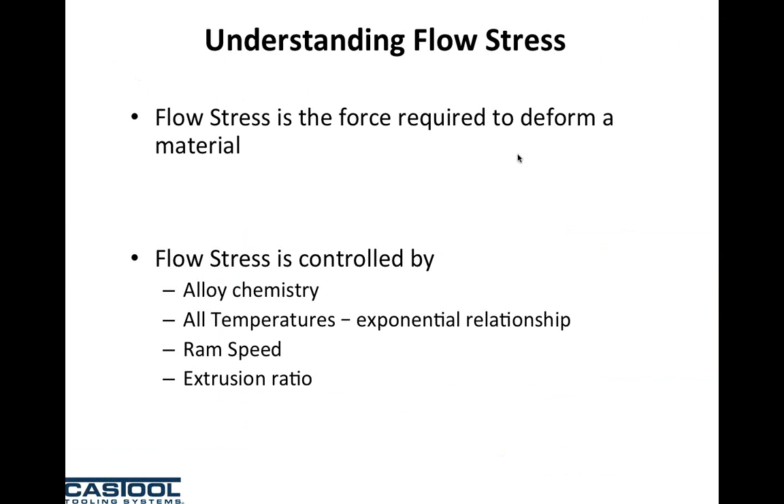So the factors that would affect the flow stress: if you look at different types of alloys, 6061 has higher flow stress compared to 6063, so it's harder to extrude. Also, the temperature affects its flow stress. At a higher temperature, the flow stress is lower, so it's easier to extrude through the die. And when you try to deform the material faster, increasing the ram speed, then you will also increase the flow stress, making it harder to extrude. And obviously, when extrusion ratio is high, it will be harder to extrude as well.

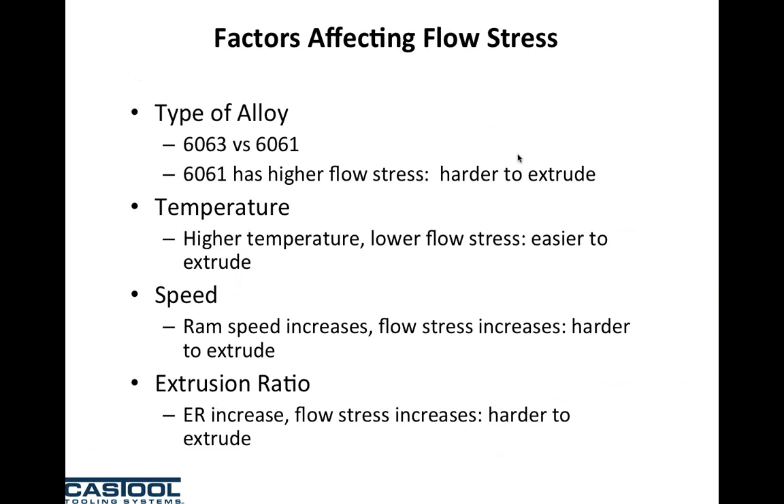When we look at ram speed, what's interesting with 6063 alloy is that if we double the ram speed, we only increase flow stress by 10%. So most people would believe that if you doubled your ram speed, your flow stress would go up similarly. But it's actually quite easy to go faster.

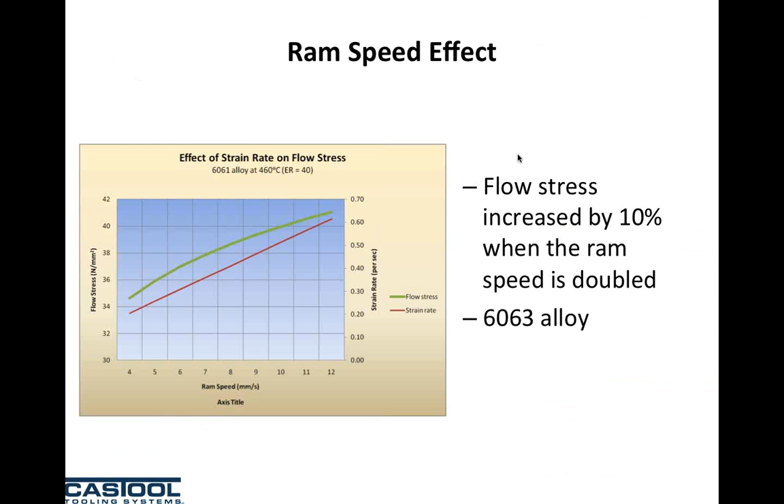The temperature effect is exponential, so all alloys are temperature sensitive. Looking at 7000 series alloy, every time you drop the temperature by 20 degrees Celsius, the flow stress increases by 20%. For 6063, a 20 degree Celsius drop increases flow stress by 10%. Compared to RAM speed, which is relatively insensitive, temperature is very, very sensitive to flow stress.

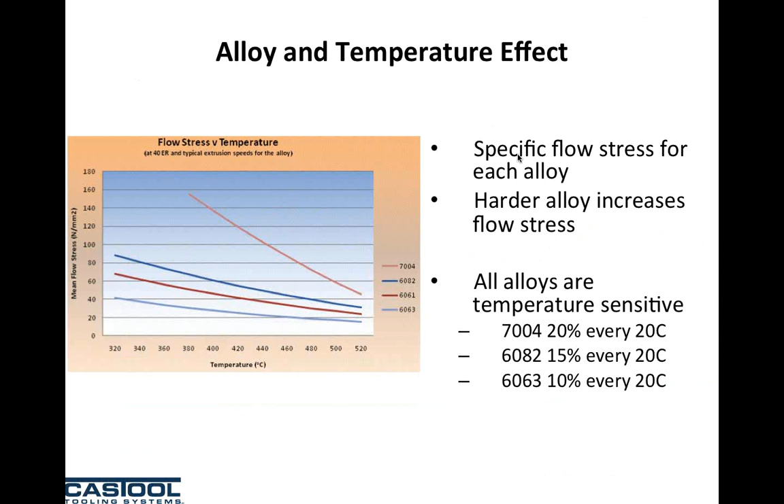If you're only extruding 6063 alloy with comparatively simple shapes and have poor temperature control, you can probably survive. But as you start moving into 6061 and 6082, temperature has more effect on flow stress, and when you have temperature instability or poor control, you have a hard time making profit.

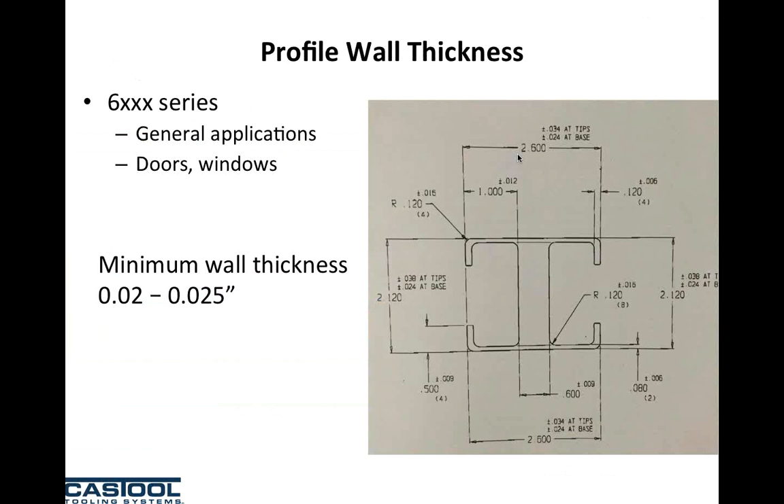When we look at wall thickness, flow stress also gets involved, and I think this is something a lot of people forget. If you're doing a standard window shape, you may have minimum wall thicknesses down as low as 20 to 25 thou, and 6063 is an adequate alloy for this. But if you want to do heat exchanger tubing or precision tubing where wall thicknesses can get down to 8 to 10 thou, often less than 15 thou, the reality is the flow stress of 6063 does not enable you to extrude that thin of a wall. Basically, the die would plug and nothing would come out the other end. So we go to alloys with lower flow stress that can also extrude thinner walls.

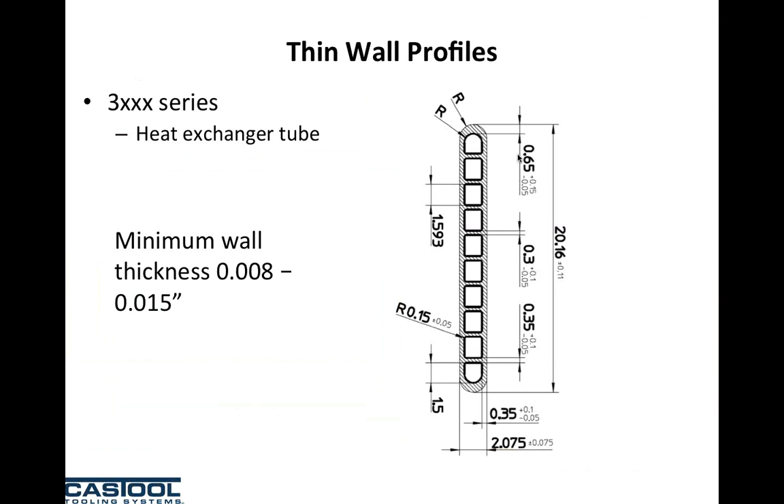What's interesting is the minimum aperture or wall thickness you can extrude through the die is also very similar to the gap between the dummy block and the liner. So the aperture or gap between your dummy block and liner at temperature during operation is virtually identical to the die aperture.

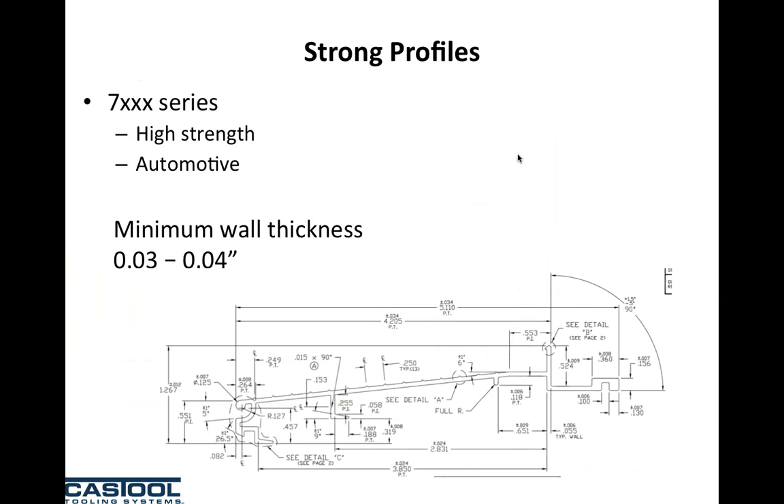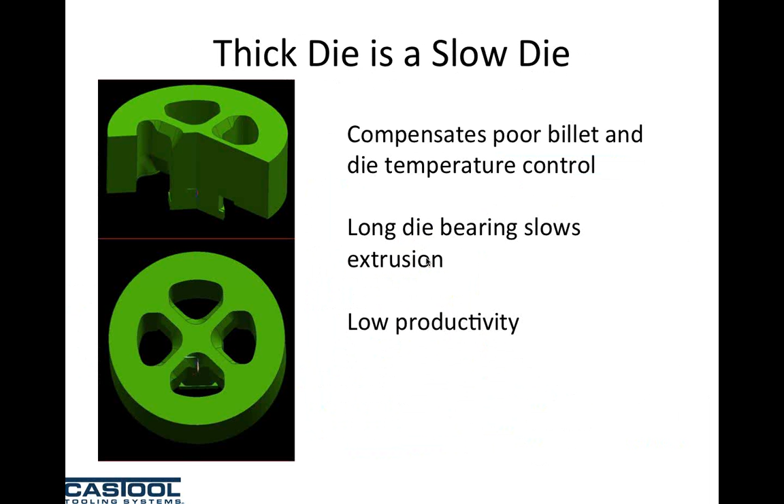This is a look at what is a rather thick die with rather small ports. Typically these are used to compensate for poor billet and die temperature control. Last week I was with 7 different extruders through Southeast Asia, and all the die correctors want thick dies with long bearings, because they do so much die correction due to temperature instability that they need something to work with. If given a thin die with open ports and short bearings, there wouldn't be enough material for them to control the die. The problem is a thick die with long bearings is a slow die - it requires a hot billet temperature and ends up with a rather slow ram speed.

The alternative is a high-performance die. These require temperature management of the billet, die, and container, and very often the same people using these dies are using lean alloys. What they're achieving is ram speeds typically 40 to 50% faster than the average in the marketplace. So a lot of extruders say, great, I want one of those high-performance dies. But unless your billet temperature is plus or minus 10F, your die temperature is plus or minus 10F, and your container is stable at plus or minus 10 degrees Fahrenheit, unfortunately it won't work. Your die corrector will come back and say, we tried that die, got lousy profiles, give me a thick die with long bearings so I can fix your problem.

When we look at the cost basis, the super extruders running these fast ram speeds have costs significantly less than the standard extruder - by significant, we're looking at a 40% difference. So by running 40% faster ram speeds, they're reducing cost, if you look at $1,000 per hour press cost, by about 40%, from 33 cents per pound to 20 cents per pound. Is it worth it? I don't know, that's up for you guys to tell us I guess. But the return on investment from managing temperature of the billet, container, die, exit temperature, quench temperature, and aging temperature seems pretty straightforward to me.

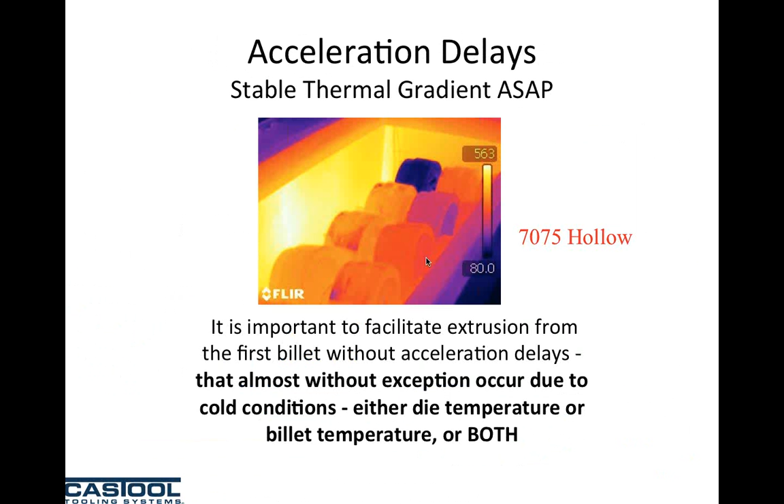I said it a number of times last week, and I guess a lot of people got upset with me - chest ovens don't work. If the goal is to have a die that's plus or minus 10 degrees Fahrenheit uniformly from billet temperature, and you're heating dies with chest ovens, it's impossible to do that. Chest ovens produce cold dies, inconsistent dies, and typically dies stay in them too long and end up with oxidized bearings.

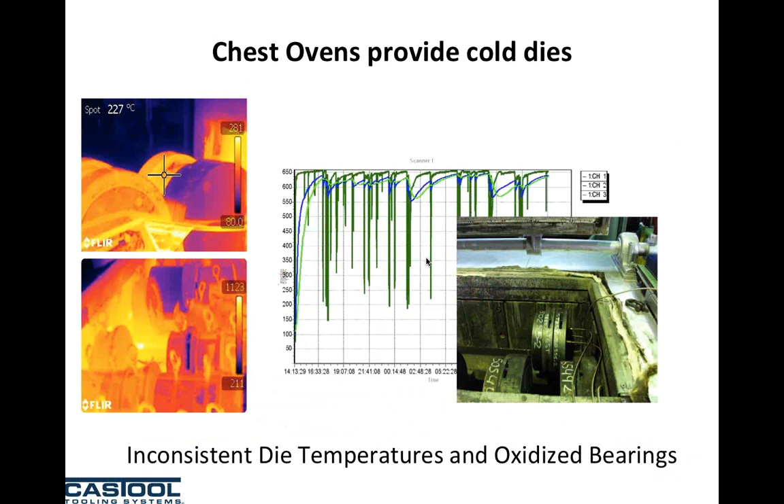Unfortunately, the die bearing, being an EDM surface, attracts oxides faster than any other item in the die oven. Another big problem, just to touch on it, is the adhesive layer on the die bearing.

A lot of people put fans in their die ovens, and basically the fan's job is to pull air from the factory and push it into the die oven to heat the dies quicker through convection. The worst thing you can possibly do is take the dirt from the factory and push it into your die oven, because it's going to end up in your die bearings.

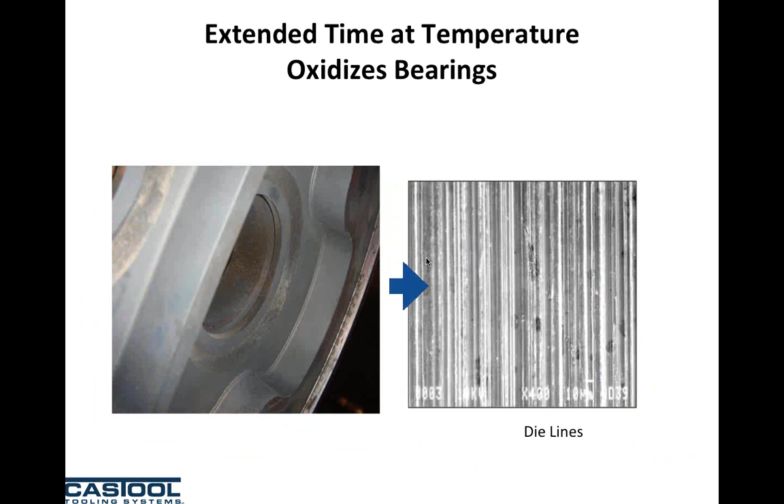Single cell die ovens basically heat one die at a time. I would say 100% of the super extruders in the world today heat one die in one oven, and it's the only way of having 100% control over your die temperature. We hear all the excuses from poor to average extruders around the world about why it's impossible to heat dies one at a time. But the reality is it works.

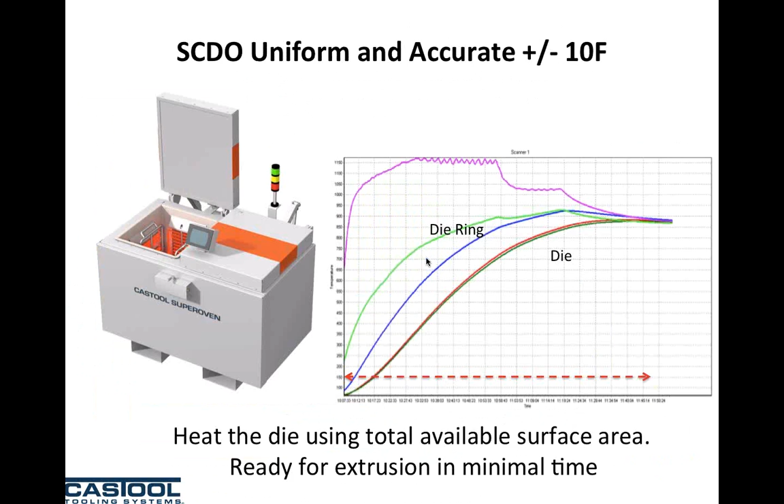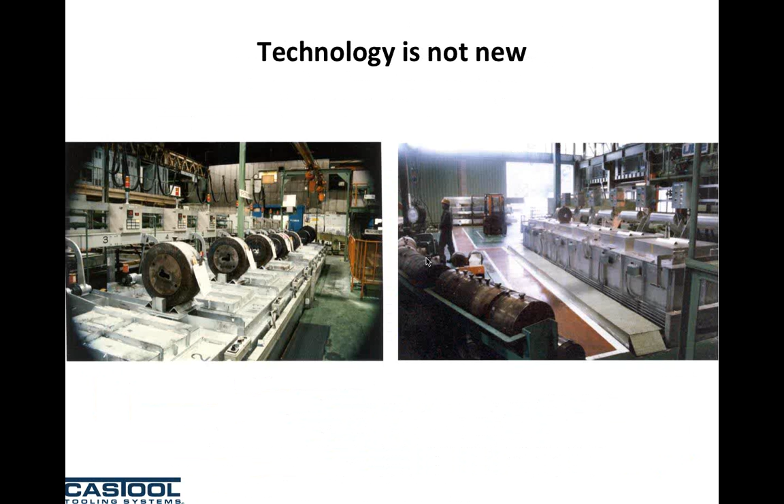Even when you have a perfect die coming out of the die oven, the die can cool down quickly in the air, around 10 degrees Fahrenheit per minute, or 20 degrees Fahrenheit per minute in the die slide. So you're not really getting the temperature you think you're getting when you leave the die in the air too long, or in the die slide too long. Then when you start to extrude, you'll start to see the flow stress get affected because of the die temperatures.

You also want to be recording these times - when the die goes into your die oven, when it comes out, and when it's used. If you have a 3 to 5 minute delay because you have a butt stuck on your butt knocker, or you're cleaning aluminum from the liner seal face, in 3 minutes your die is going to lose 60 degrees. In 5 minutes it's going to lose 100 degrees.

As a rule of thumb for 6063 alloys, we say 10 degrees Fahrenheit relates to about a 1% rate of flow. So for every 10 degrees colder your die is than billet temperature, it requires 1% more force, or the flow through the die is reduced by 1%. So if the die was 100 degrees colder than your billet - say billet 860, die 760 - it would take 10% more effort to extrude the die.

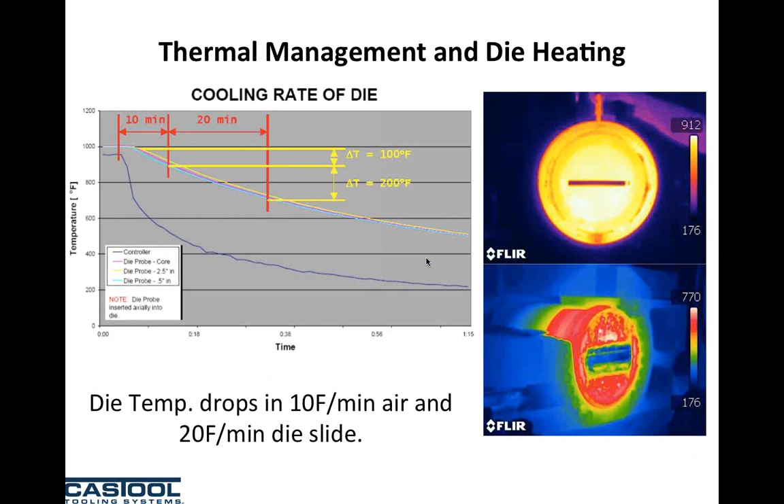We get into a lot of die correction as well, and we find that probably about 90% of all die correction is correcting the die for temperature, not because the die was made improperly. So even if we take the die perfectly from the die oven and sit it in the die slide, and leave it there for 3 to 5 minutes, the bottom of the die is going to lose more heat than the top of the die through conduction between the die and the die slide.

So your nose piece, or if you're running a 2-hole, the top holes are going to go faster than the bottom holes. Say we left the die in for 5 minutes and reduced the temperature at the bottom by 100 degrees - back to my rule of thumb, we'd expect about 10% more flow through the top of the die than the bottom.

The die corrector would choke the top bearings, and the next time the die goes to the press, if you left it in the die slide for 5 minutes again, it would be fine. But if you don't get the butt stuck on the butt knocker this time, and you actually extrude quickly, the top holes now will hold back, and the bottom holes will go through - and your die corrector will be chasing this.

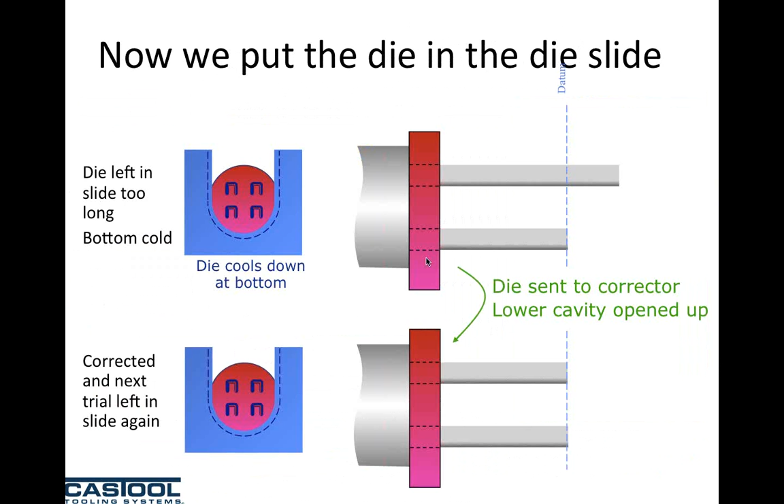Temperature affects flow rates, whether it's the container affecting the die slide affecting the die, even chest ovens tend to heat the die from the bottom up. So when you bring a die out of the chest oven, typically the bottom of the die will be hotter than the top. If you leave the die in the die slide for 5 minutes, the bottom will be colder than the top.

We'll talk about the container effect next, but typically the top of the container is hotter than the bottom, anywhere from 50 to 100 degrees. So after you extrude anywhere from 5 to 7 billets, the top of the die will become hotter than the bottom, and the flow or runout through the top of the die will now be faster. It's very difficult to correct a die for temperature, if not impossible.

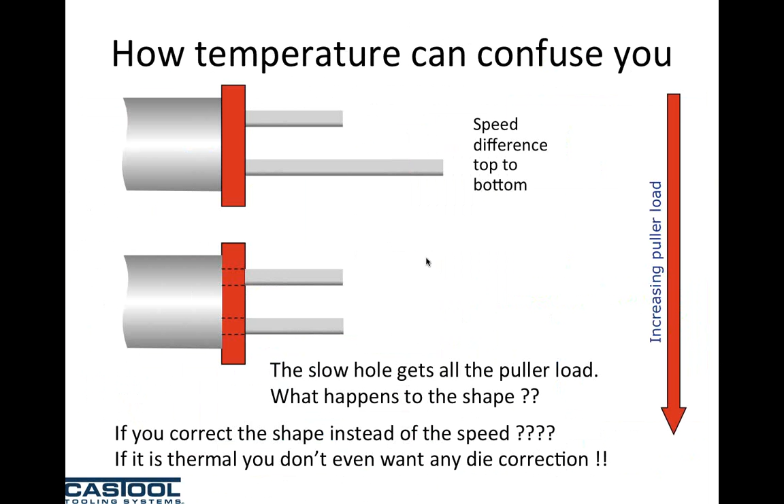The biggest problem with the container is that it's big. Containers are anywhere from 5 tons to, I think the biggest container we do is 37 tons. The die in comparison is hundreds of pounds. There's a complete imbalance, and because the mass of the container is greater, the thermal mass is also greater, so the container controls the die.

Also, when people try to heat up the container, there are several options, and we see a lot of people still using external heaters. In order for the liner to be at extrusion temperature, you need a high temperature from the shell or container shell, which can be around 700 degrees Celsius. We know even hot work tool steel, H13, would not withstand that temperature for a long time, and you're going to anneal the container.

When you anneal the container, the mechanical strength or integrity of the container is gone. When you extrude, the liner is going to be bellied. And because of the profile, it's hotter outside and colder inside, so you're going to see temperature swing and temperature changes. The liner can be too hot during extrusion as well.

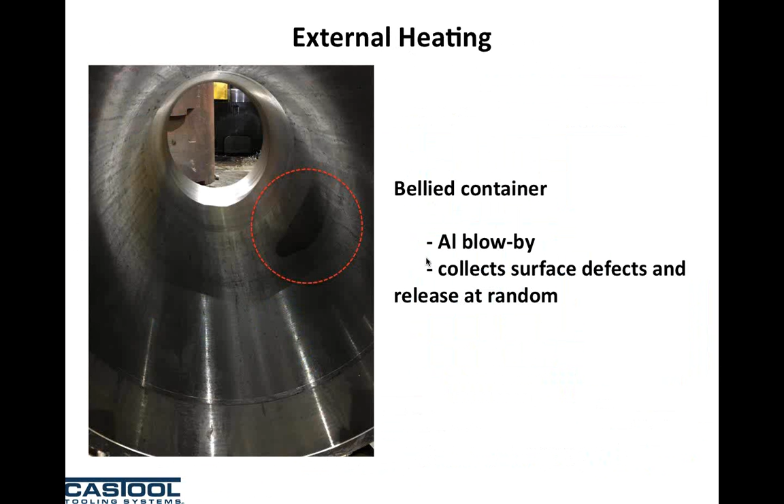So all we want, or what we are asking, the goal of the container is thermal stability. That thermal stability can give you quality extrusions and high productivity, and also mechanical alignment, because when you expand the container, due to its diameter, the alignment can be off, and we want to have a round cylindrical bore between the liner and the dummy block. So to rephrase, thermal stability of the container is the key.

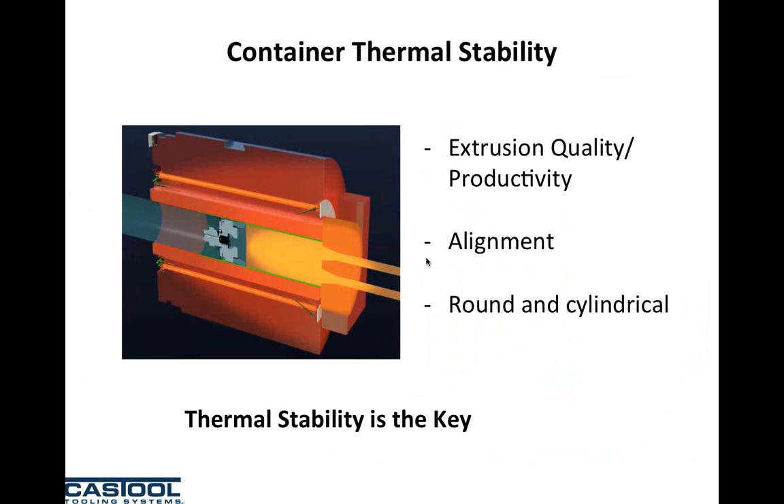If we take a look back at our external heating - actually we'll go with this one. A lot of extruders that I visited last week operate 6 days a week. On Sundays, basically, they set their liner at 800 and some odd degrees Fahrenheit, and the heating elements are running between 1300 and 1400 degrees. So by Monday morning, the container housing is easily 800 degrees, if not 900 degrees.

When the container housing is hot, it actually lifts the container and ruins the alignment between your container and your die, and your container and stem. So it's not just about temperature - temperature also affects mechanical alignment.

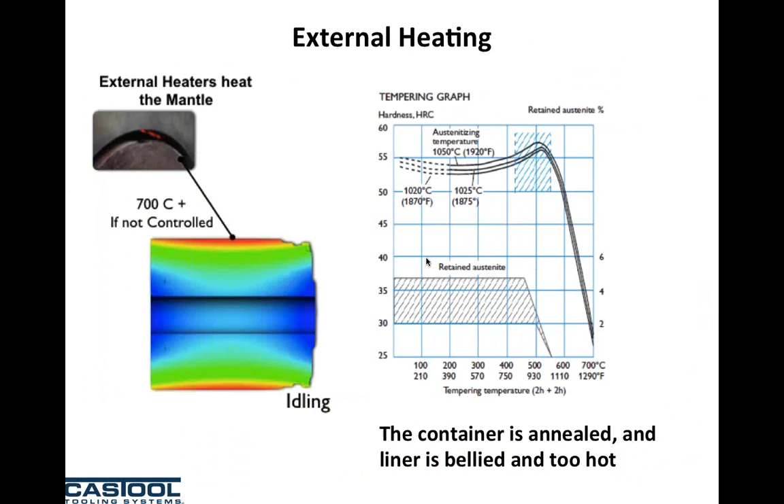Also, the temperature of the liner would affect the billet skin flow. What you want is a consistent temperature differential between the billet and your liner surface, around 50 to 60 Fahrenheit, so you can hold back the surface defects and keep them there as a skin, and use a cold cleanup block to clean after.

If you don't know the temperature of the liner surface, you don't know if the skin defect is going to stay at the shell there or go into your profile extrusions. So it could be anything if you don't control the liner temperature, or if you don't have thermal stability of your liner. Again, the goal is to keep 100% of the inverse segregation and oxides in the butt. What we don't want is any of that basically leaking into the profile.

We can help it by keeping the port openings away from the liner, and by doing all sorts of good housekeeping things. But if your liner is unstable or approaching billet temperatures, the oxides that we want to hold back into the butt on the liner wall are going to be leaking into your profile.

Last week, again, I was at 7 different extruders, and every one of them brought out lots of samples to show us of bad surface finish. And when surface finish is random, it's typically the fault of the container, not of your alloy. Just about every extruder I visited had installed billet brushes. Cleaner billets are great things, but these surface defects weren't being caused because people had dirty billets. They were being caused because they had hot liners, unstable liners, and bellied liners.

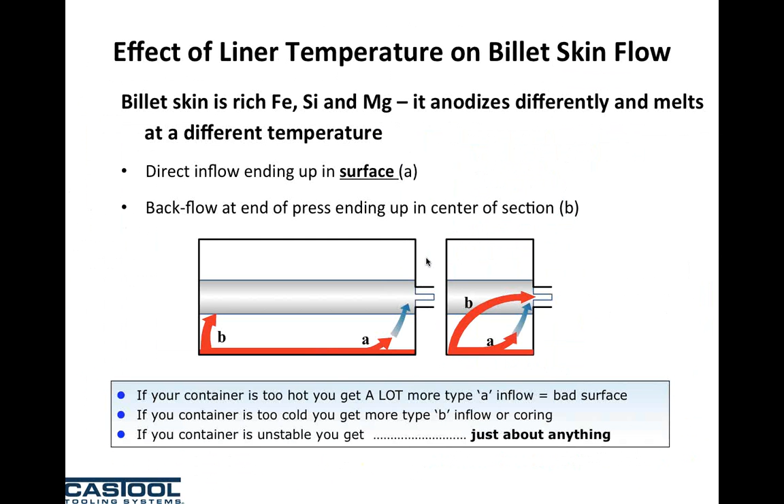It was a matter of inverse segregation and oxides being leaked into the profiles randomly. So the trick is, how do you balance the heat in your container? Because the container is a big chunk of mass and cylindrical, and there's no way to reach the hot deformation zones.

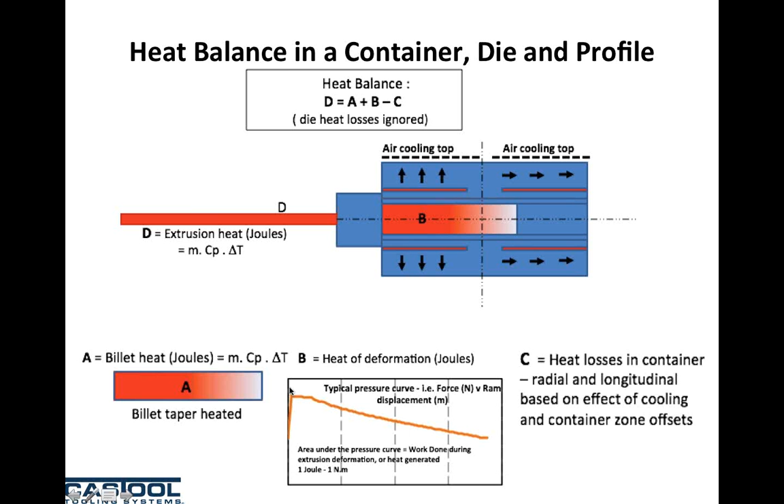But what we can do is a simple, quick heat balance between the extrusion profile, the billet coming in, and also the heat of deformation during extrusion. You can see this on the top of the graph. The only thing we can control is component C, because component A is the billet coming in, D is the profile going out, and component B is the extrusion curve. Component C is how you take away the temperature, and we can do that by manipulating these equations, which is pretty simple.

There are three main parameters here. One is the temperature gradient of the container. The second is the thermal conductivity of the material used. And the last one is the surface area.

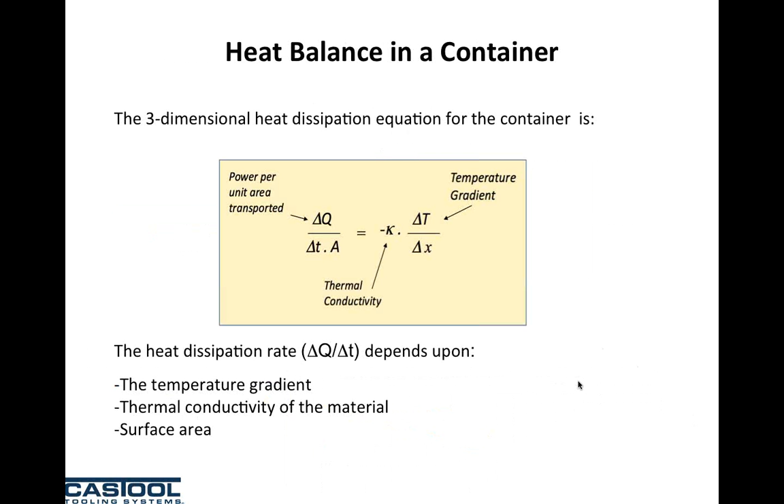So if you compare three different container designs, you can place your heater in different locations. A lot of people still use external heating elements. We see some people use center-of-mass heaters, but we think the best one is if you put a heater close to the liner.

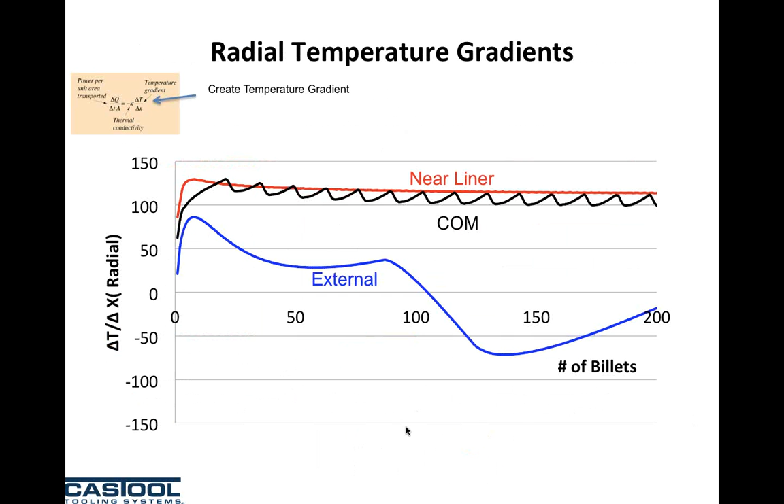And when it's hotter, you're going to get type A inflow. So typically, if you have external heaters and operate 6 days a week, every Monday afternoon you're going to have bad surface finish until the outside of the mantle is cooled so you have the proper gradient and are able to dissipate heat. And even with center-of-mass heaters, unfortunately we have instability—the liners tend to go from set point hotter, and there's no way of actually getting the liner down and stable where we'd like it.

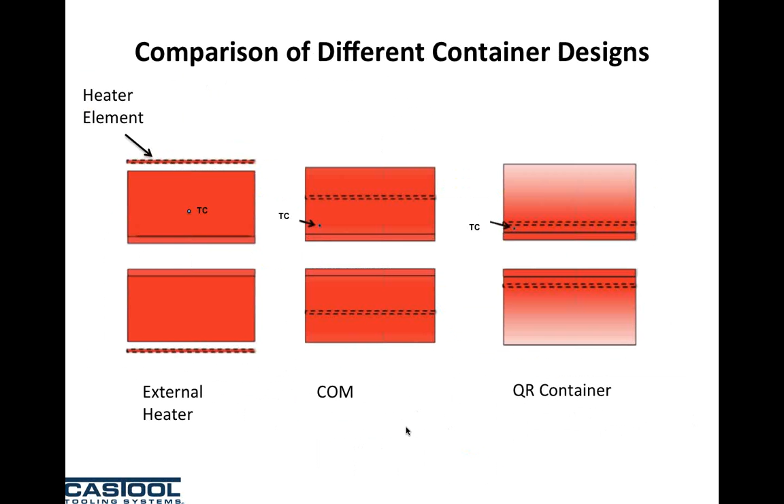One other benefit, going back a slide, is energy consumption. Having a hot container and hot container housing costs a lot of money. If you allow the container housing to be 200 to 250 degrees Fahrenheit, and your container to have both a longitudinal and diametrical gradient, we can reduce energy costs anywhere from 50 to about 70%, which is considerable when you look at it day after day, month after month.

So the second component we're talking about is the thermal conductivity of the container itself. What we think would be the proper material to use is 4340, because it has high thermal conductivity compared to H13 and H11. Also, its toughness is double compared to H13 and H11.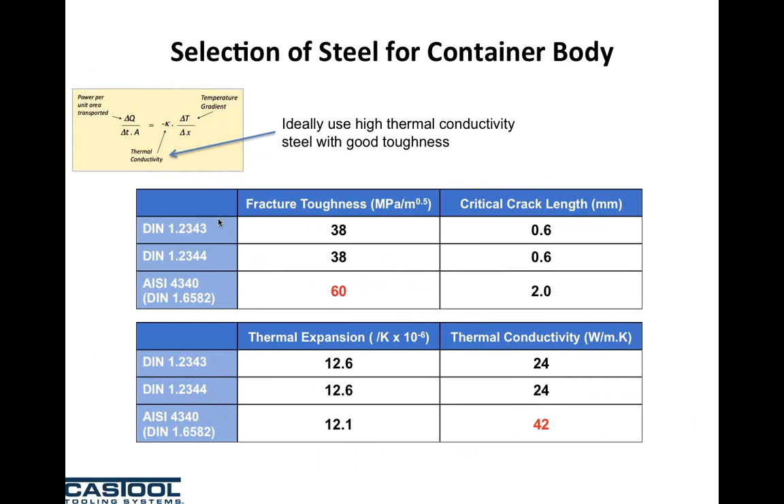What's interesting is if you couple the thermal conductivity and temperature gradient together, you see when you put the heater close to the liner, the temperature gradient is multiplied by using the right material, 4340, compared to if you put the heater at the center of the mass with conventional H13 material.

You see the heat dissipation rates are vastly different. That's why in a lot of containers, as they extrude, the temperature of the liner starts to creep up, because the container doesn't have the ability to dissipate the heat. The blue one is the worst, the external clamshell type. You have positive and then it goes to negative, so you take away heat and then supply heat to your liner and billet as well.

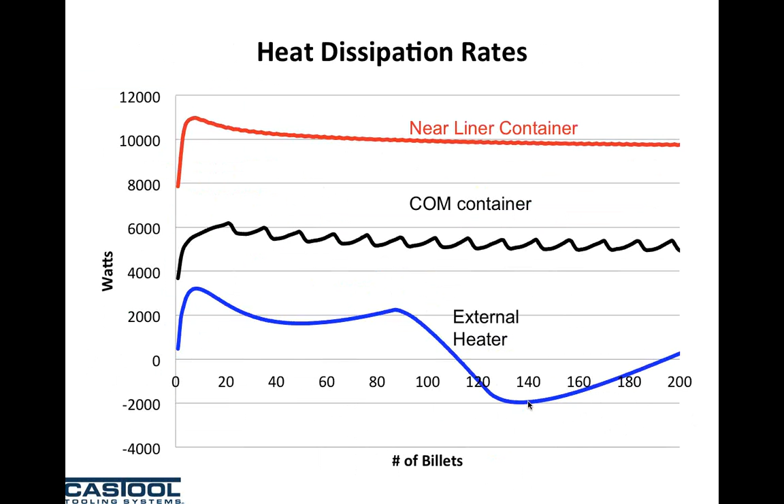So we talked quickly about the diametrical gradient. By moving the heating elements close to the liner, we get a diametrical gradient. If our billet was 860 degrees, we'd like our liner to be maybe 800, 810. The outside of the container maybe 400, 450, and our container housing to be 250. That's our diametrical gradient.

We also want to have a longitudinal gradient. There's no reason whatsoever to have the entrance of the container at the same temperature as the exit. If we provide a taper longitudinally, we allow more dissipation. So we can dissipate heat from the liner to the outside of the mantle diametrically, and also dissipate it from the exit to the entrance.

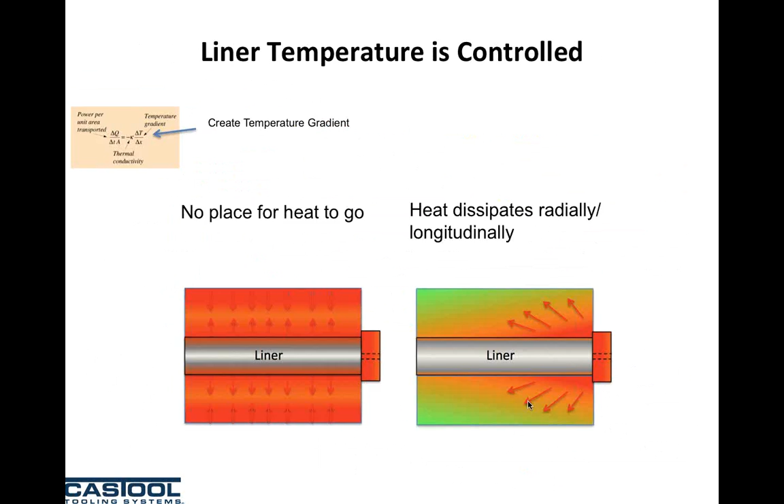Sometimes for some profiles that require very high productivity, there's too much heat to dissipate by the container itself, so we put supplementary cooling on the OD of the container. The reason most people air cool the liner when they have heating elements in the center of the mass is that the combination of H11, H13, 2343 or 2344 with heaters in the center of the mass doesn't give enough heat dissipation, and the liner gets too hot.

So the reason people do air cooling between their mantle and liner is to cool the liner down and reduce type A inflow. As you get into microtubing, 1100 and 3000 series alloy with extremely thin wall thicknesses and extremely high extrusion rates, even a container done with 4340 with heating elements close to the liner may need assistance dissipating heat. Except in these extreme circumstances, this type of container doesn't require air cooling.

When it does, we put heat sinks on the outside of the mantle and run air through it to give us more. We have the same situation with a number of presses still in the United States that used to be 6-inch presses, where people have opened up the liners and are now running 7-inch. The container that was built for the 6-inch doesn't have the mass to dissipate heat at the rate needed to maintain a stable liner condition.

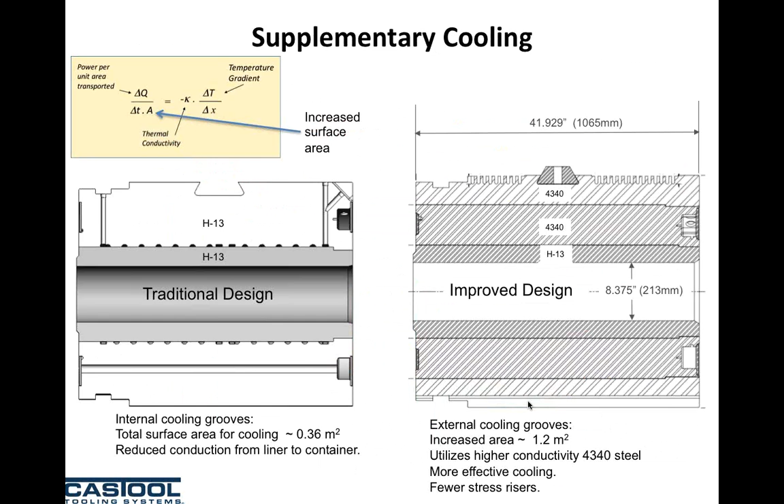We also worry about the physical dimensions of the liner during extrusion. All container makers put a shrink fit between the liner and mantle to try to add strength. A 3-piece container is definitely stronger than a 2-piece container. What's interesting is if we look at a standard 40-inch container for an 8-inch billet, the amount of expansion on the bore of a well-made 2-piece container is about 35 thou.

When we look at the dummy block and the container, we work this into our calculations. We may allow somewhere 20 to 30 thou clearance at room temperature between the dummy block and container. We may have about 30 to 35 thou expansion in the dummy block during operation, and we allow for about 35 thou deflection of the container bore during extrusion, and everything is fine. What happens if we suddenly go to a 60-inch container?

The amount of expansion of the liner bore goes up by close to 50%. So the same container, same dimensions, that was 40 inches long will now expand about 50 thou. Depending on the flow stress of the alloy we're extruding, the aperture between your dummy block and liner may now be big enough to allow aluminum seepage between the two.

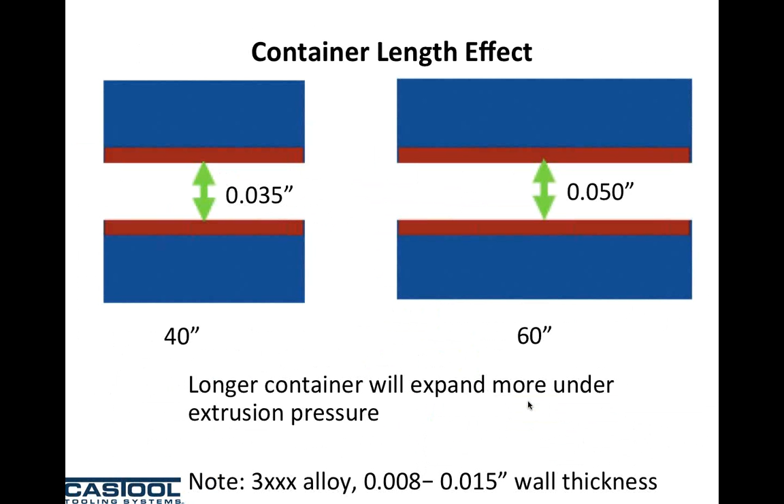If we then make that 60-inch container three-piece with the proper shrink fit, we can decrease the expansion of the bore to 33 thou versus 50 thou, basically bringing it back into a stable condition where we're not affected by aluminum blow-by in the liner.

This seems to be something a lot of people aren't paying much attention to in the marketplace, and it's not the dummy block's fault. If you have a dummy block with a 60-inch container and your container is two pieces, you're going to have a problem.

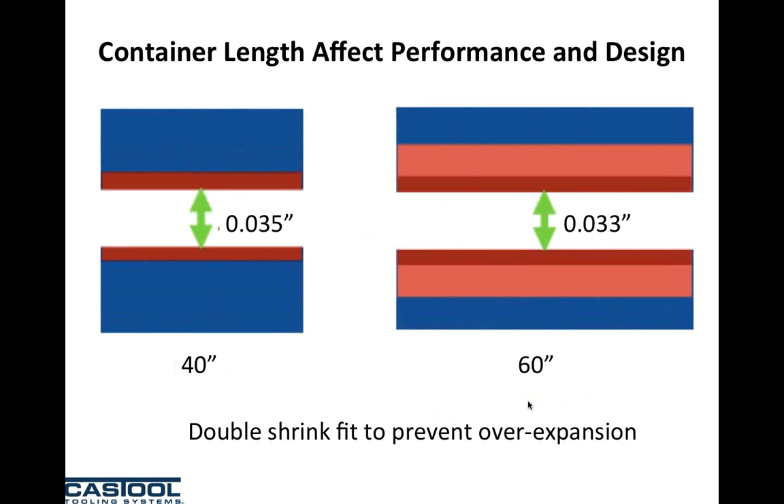This is just a chart that Ken did up for me, and we looked at a 40, 50, 55, and 60-inch container.

Two-piece, the 40-inch container will expand about 35 thou; three-piece 23 thou. As dummy block and tooling system manufacturers, we don't worry about 35 thou expansion. We can work with that between the expansion of the dummy block and the flow stress of the alloy.

As we get into 50 inches, we're probably still okay as long as it's not soft alloy with 45 thou expansion of the bore. As we get into containers that are 55, 60-inch long or longer, there's too much mechanical expansion in the bore to be able to put a dummy block in there and control the aluminum flow-by. So in all cases, when we start getting above 50 inches, we recommend going to a three-piece container to be able to control the expansion.

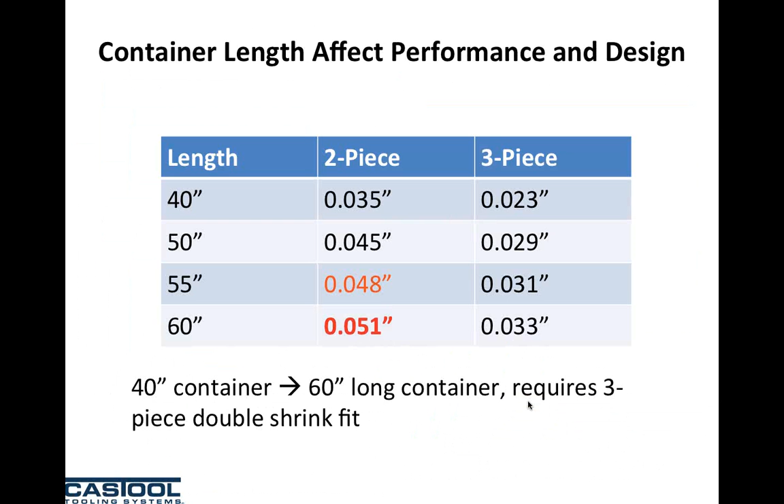And again, if we're doing soft alloy, we would tend to do it sooner with shorter containers. This minimum gap for 3000 series alloys is about 15 thou. 6000 series alloys is about 25 thou, and for 7000 series is about 40 thou. So as we get involved with alloys with lower flow stresses, the gap or critical gap between the dummy block and container at operating parameters becomes smaller.

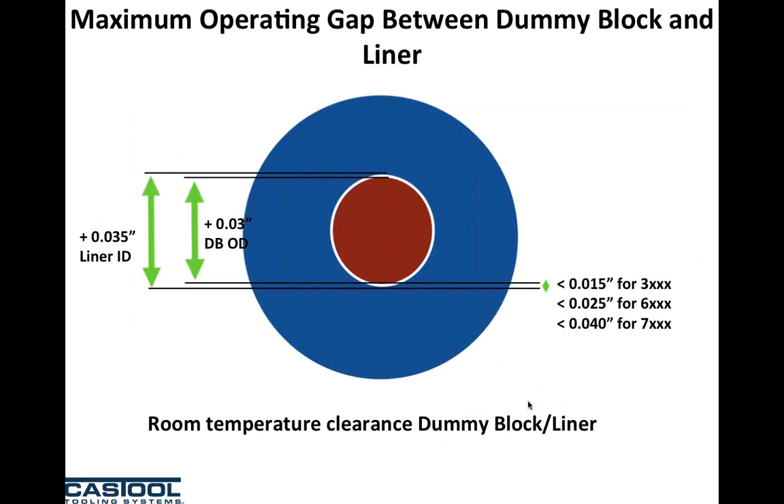Dummy block clearance is alloy dependent. Clearance becomes more critical with soft alloys than it is with hard alloys. Typical expansion on a dummy block is 25 to 35 thousandths on diameter.

What we want to do is have the dummy block collapse back to as close to nominal as possible after the push. So when the dummy block comes back through the liner bore, we want it to go back to nominal size. We want the dummy block to yield as little as possible. All dummy blocks yield, so we're going to get somewhere 3 to 5 thou per diameter yield of a dummy block just about immediately. What we would hope to do is curtail or stop any further yielding as long as possible.

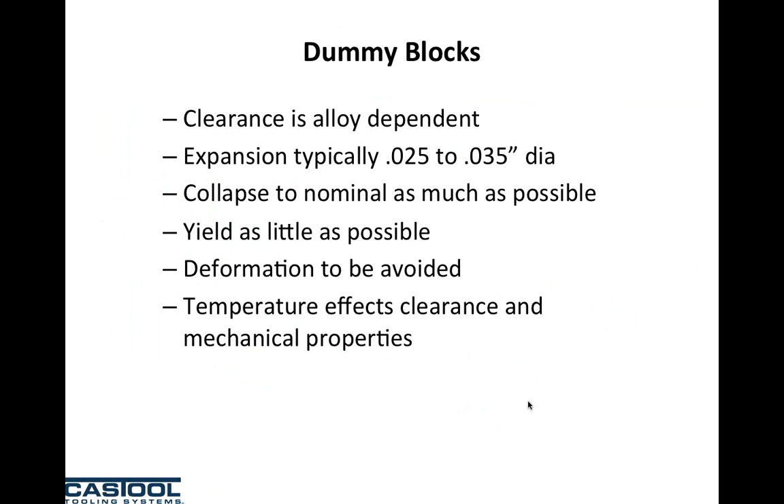Deformation is typically because of time and pressure, so we want to be able to cope and deal with pressure and time through design. Temperature affects clearance. If you put a cold dummy block in your press and you start extruding, you've increased the operating clearance substantially. You're probably going to get immediate blow-by. You also change the mechanical properties of the dummy block.

A lot of presses have gone to longer billet these days. With longer billet, we've increased the amount of friction lost between the billet and the container. Typically about 30% of our total press pressure is lost to friction between the billet and the container. If we increase the billet length by 10 inches or 20 inches, we need more pressure to be able to break through the die.

What would happen if we went from a 40 to a 60-inch billet, and we had adequate pressure for a 40-inch billet at 50 or 60 inches, more of that pressure would go to friction and we wouldn't be able to break through the die. So we actually have to increase the tonnage capabilities of the press.

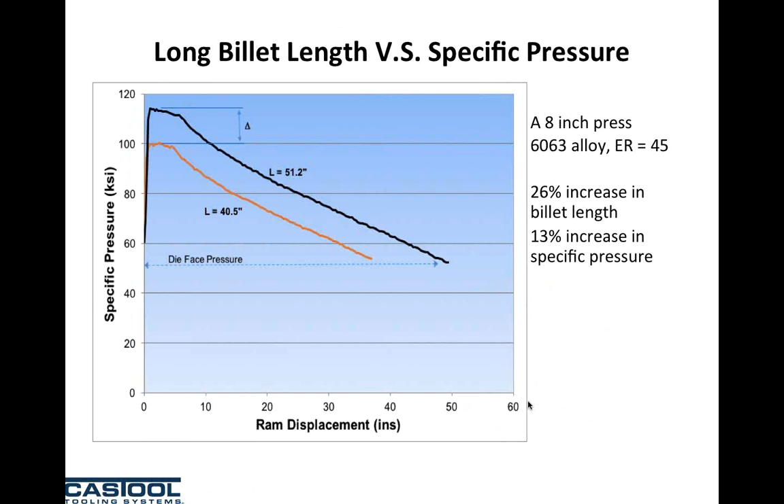Fortunately, Ken's done a lot of work on this, and I'd like him to explain what happens. So what happens is when you increase the pressure or specific pressure that the dummy block sees... May I just add one thing: the die doesn't see any more pressure. Yeah, it's just the dummy block, because the friction is taking care of the other side, the die side.

So the dummy block is already operating around its limit already. Now we increase the pressure, the specific pressure the dummy block sees, and you can see on this study, the top one is around 100,000 psi. You start to see some red areas, which means the block is starting to yield. When you increase by 20%, which happens with a longer billet, 120,000 psi, a lot of them became red. So red means the block has yielded, and so when you expand, the nominal diameter of the dummy block is going to be different, and it's going to collapse differently as well.

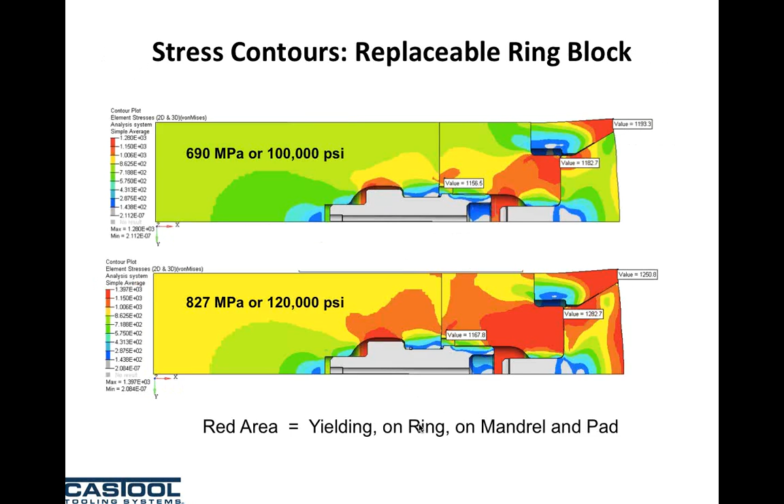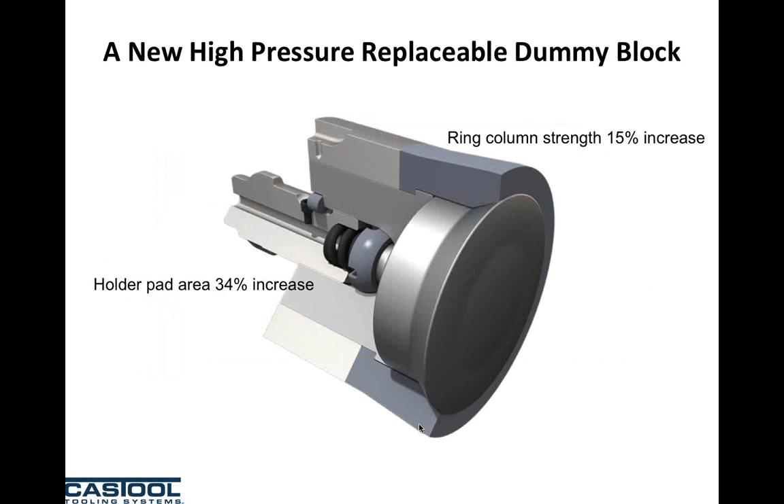So then we need to come up with a new dummy block that can withstand higher pressure. We increase the column strength by 15%, ring column strength, and the pad area by 34% to withstand the higher pressure that we just mentioned.

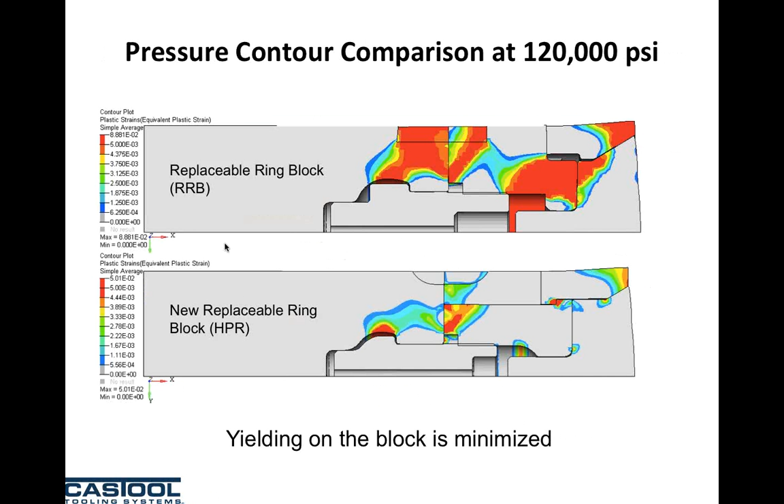This quick study shows on top the replaceable ring dummy block at 120,000 psi, and on the bottom the new replaceable ring at 120,000 psi. The yielding on the block is minimized so that it's able to function properly, open and collapse properly, with repeated cycles at 120,000 psi.

What we're trying to achieve, through a high pressure dummy block and a stable container bore, is an efficient interaction of container, liner, and dummy block. When you push, the active clearance between the liner bore and the dummy block is consistent, and when you retract, the dummy block isn't yielding, the nominal stays the same. So you can retract without dragging the aluminum skin out of the dummy block or out of the liner bore.

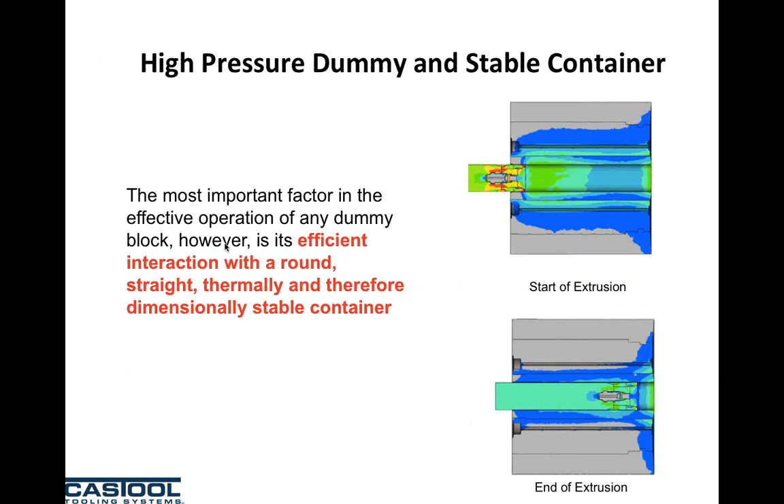The graph shows a simulation study on 6063 alloy, in metric units, that's about 8 thou for the aluminum skin. You can see the aluminum skin is quite consistent from the start of the push at 10 seconds to the end of the push at 45 seconds. That's what we want, a consistent aluminum skin, which tells you the bore is concentric, round, and straight, and the liner is stable with no alignment issue between container and dummy block.

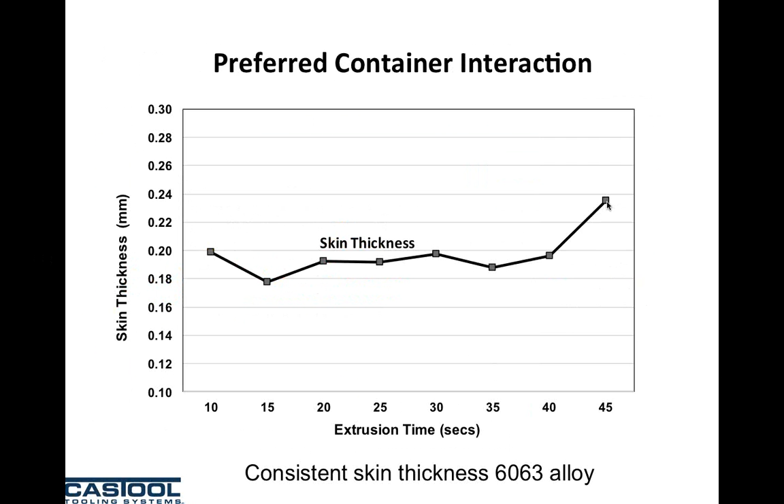So flow stress matters, and it's an easy way to understand the interaction between the billet, the container, and the die. Alloy affects this as we get into softer alloys with lower flow stresses. The critical gap in the die, or the aperture, is important if you want to extrude extremely thin wall shapes.

The critical gap between your dummy block and container is the same as the die. For precision tubing, you want pretty much a 3-piece container because we want to decrease the deflection in the bore, running with minimum clearances possible. Typically we run reduced expansion, reduced clearance, 3-piece containers, and because the alloy is very temperature sensitive, we control the liner bore to plus or minus 5 degrees Fahrenheit for precision tubing.

Extrusion ratio and profile wall thickness, as I mentioned. Thermal management of the billet is plus or minus 10 degrees, or plus or minus 5 for precision tubing. The container is plus or minus 10, precision tubing plus or minus 5, and the die the same. The container dummy block interaction is extremely important.

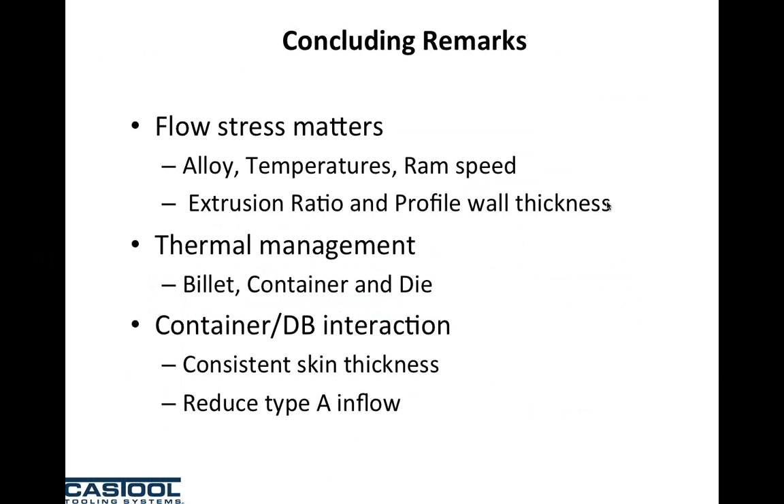It was a Superextruder slide. We'll go back for a minute.

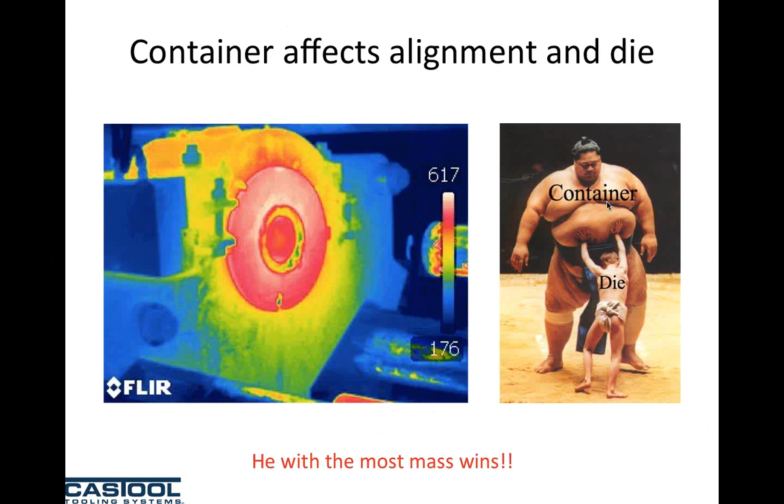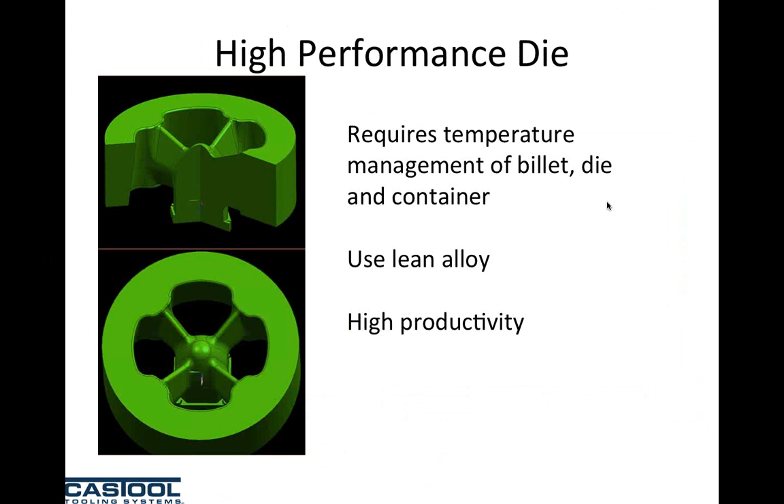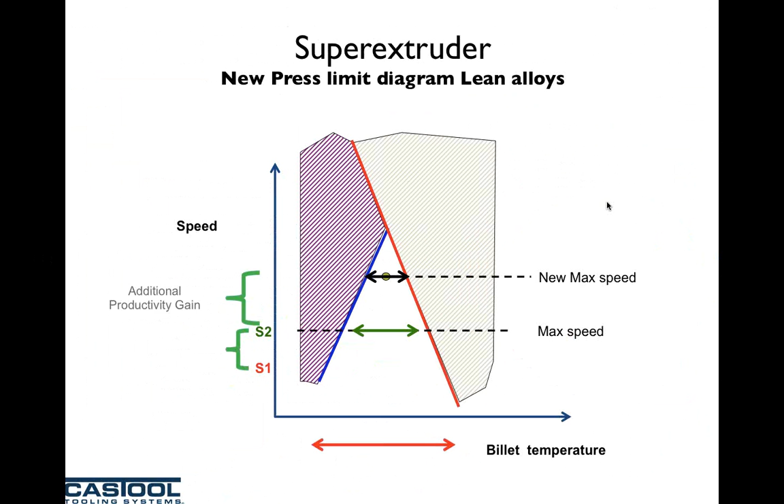I guess it could have been when we had the limit diagram. Just 1 second. Actually, we don't have pickup on again. We have surface defects and tearing once you're on the right side of the red line, and that's alloy dependent. But again, pickup Mg2Si. Yeah, I'm trying to find it. Maybe that's a good question to ask us afterwards. I'm not quite sure where it's at, sorry. Yes, please feel free to contact Paul or Ken directly. They would be happy to help you, or call me and I'll put you in contact with them. But, you know, the last couple of weeks I've been running around the world with Hydro talking about surface finish, so we're very current on the subject.

Okay, well, I think that may be all the questions we're going to have today.